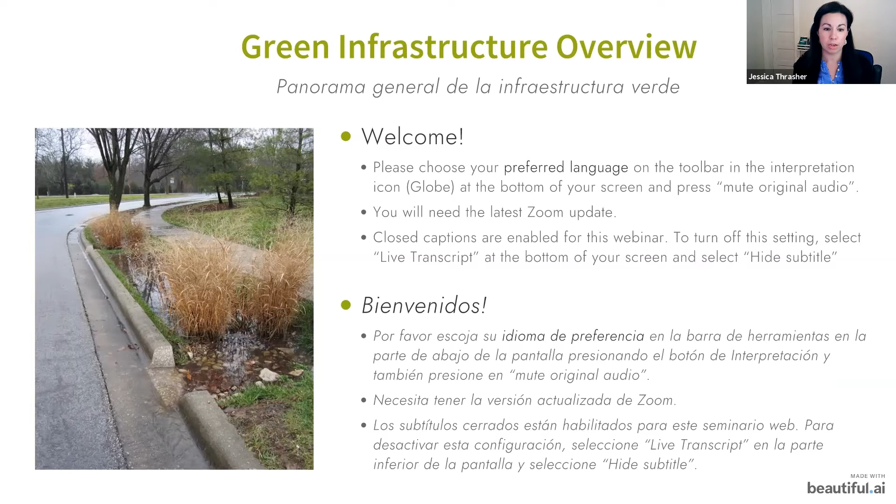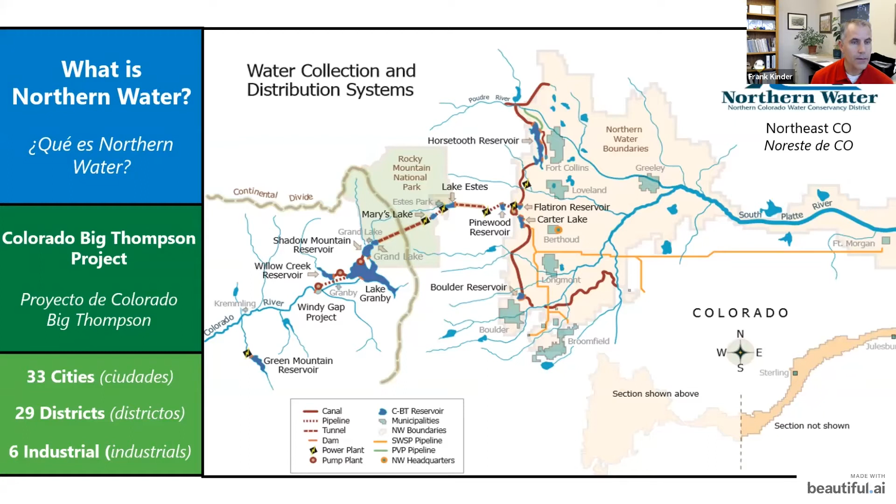If you're unfamiliar with Northern Water, in the last 3 years we've launched a variety of services in support of what we're doing today. We have a campus here in Berthoud where you can come see wise water landscapes. We provide consultations to HOAs, businesses, and municipalities. So if you're in a community that could use our consultation service, which is free of charge, we welcome you to reach out to us.

We also provide irrigation audits to establish a benchmark for water use in existing landscapes. Further, we can also help with future landscapes and understand ways to maximize designs for low water use. We have some tools available on our website under fact sheets and tools. We also provide grants to transition high water use landscapes to low water use and provide ecosystem services to support pollinators and other species. And then we also are helping cities plan for efficiency - there's a lot of growth in the region, and we want to be as responsible as we can with that growth to maximize water efficiency, considering the drought we're in.

Training and events are one of our feature services, like our program today. We also provide an annual conservation fair, generally in the summertime - once COVID is over, we welcome you to attend, generally in June. Finally, we run a network of 23 weather stations in the region where we provide details to people providing irrigation in the most efficient format, watering to ET or below. We would like you to visit our website, find out what we've got to offer, and then we would welcome you to future training events.

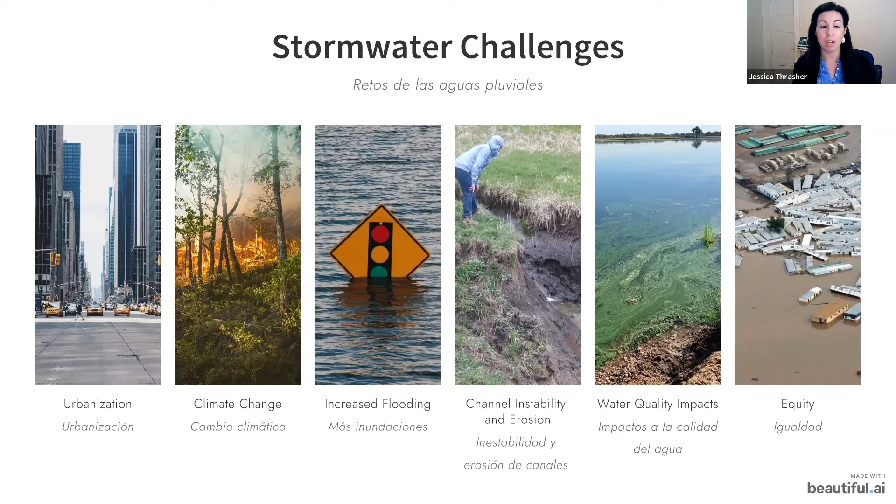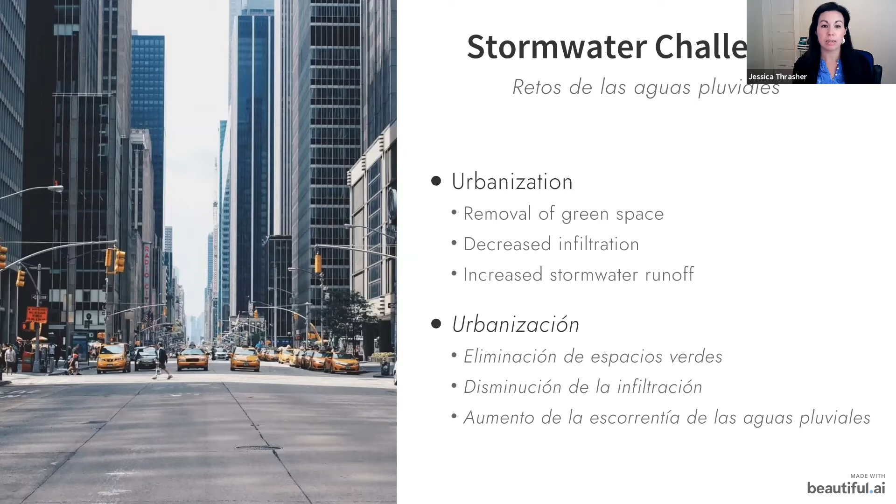The reason why we're having these increases in stormwater is due to urbanization, or the paving over of our landscaped areas as our cities expand. This has caused a lot of different issues, one of these being the removal of green spaces and decreased infiltration. Whereas before, when it was vegetated cover, the water was able to soak into our landscapes. But as we paved over those surfaces, that water is no longer able to infiltrate, and this has caused an increase in the amount of stormwater that we're seeing.

Now, those are just a bunch of numbers. So how does that really relate to you and all of us? Well, if we have a change in our landscape that goes from 10% runoff to 55% runoff, that means we're having to deal with a substantially increased amount of stormwater.

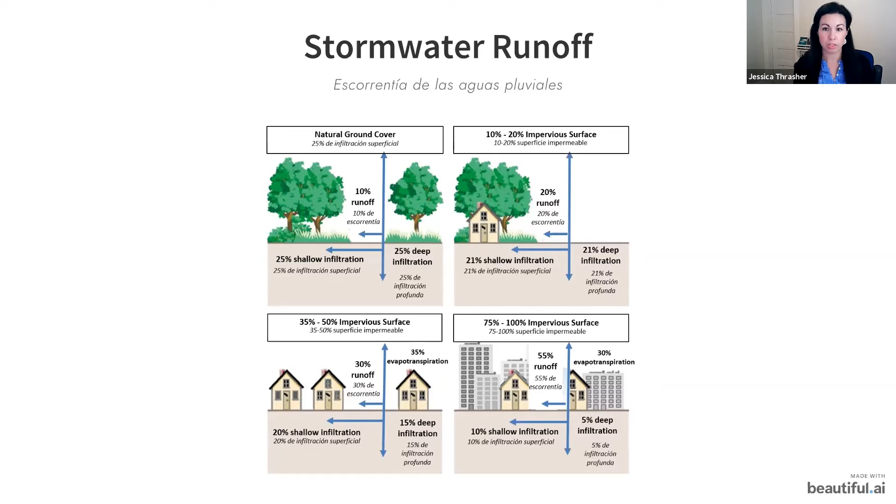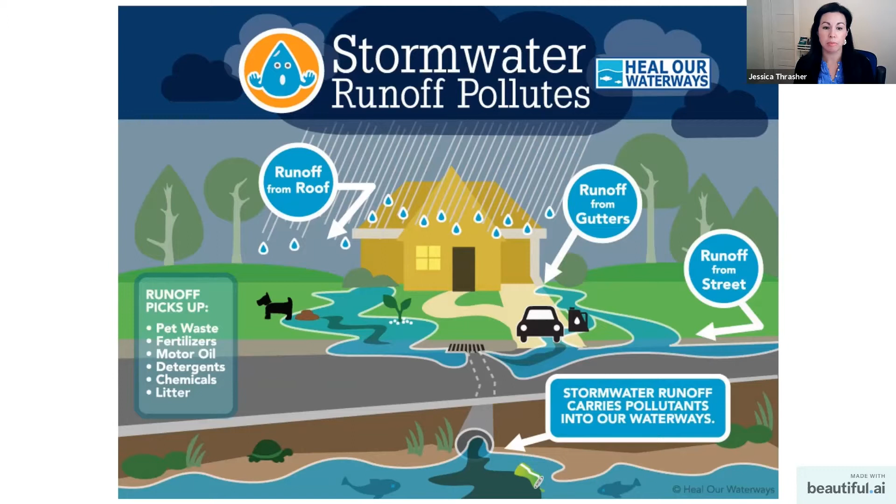Additionally, one of the other stormwater challenges we're seeing is climate change. In our region, we've seen in a very real way this year, drought. Drought is becoming less of an event that we see occasionally and becoming something that we are dealing with regularly. We're seeing multi-year droughts now, and we're trying to figure out how to manage the amount of water we have with the increase in population, while receiving less precipitation overall.

Additionally, with stormwater, we have wildfire. The intersection of stormwater and wildfire are extremely connected. This year, from last year's fires, I'm sure Northern Water is very involved with this and can speak at length about it. But the way wildfires are impacting our water quality is that we're having more sediment run into our waterways. There's less infiltration because of those burn areas, and so increasing volumes of water are running down hill slopes and into our waterways. I'm not sure if you've heard about the Glenwood Canyon mudslides, but the burn areas were receiving a lot of water and causing mudslides. So water and climate change are very closely tied.

As I was mentioning too, as we have increasing impervious areas, we have increasing amounts of flooding. This can be nuisance flooding, where we have more dangerous driving conditions, or basements flooding, or if you're trying to have a walkable city, you're no longer able to because the sidewalks are flooded. Or these could also be catastrophic flooding. We even saw this earlier in the year with the Poudre Canyon, where there were several tragic losses of life because of that increased runoff in those burn areas.

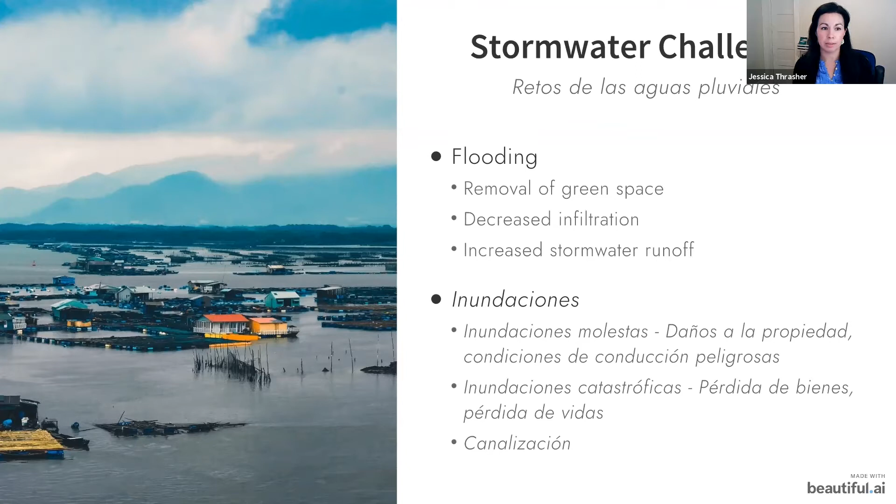We also have channel instability and erosion. As we have increased volume of water coming down, this is cutting into our vegetated areas and making these channels. As water moves across a vegetated surface, it infiltrates, and those pollutants that were in that water are then absorbed into that landscape and trapped into the soil profile. The water that goes through that profile is then cleaner. So that vegetation cleans the pollutants out of the water, and the water that goes into our groundwater systems is then cleaned.

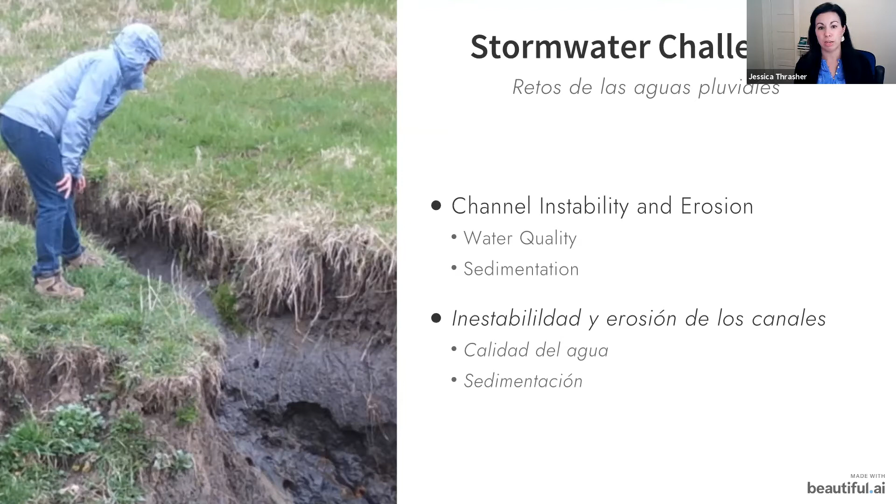When we have channel instability and erosion, water cuts through those layers, and those pollutants that were trapped within the soil profiles are then re-released into our water. So then we have sediment in our water, but also those pollutants that were in that vegetation previously, thus lowering our water quality.

As I mentioned before, as stormwater moves across surfaces it picks up trash and debris, potentially E. coli from pet feces, and deposits it into our waterways along with fertilizer. This can create issues around algal blooms, which pose hazards to human, pet, and aquatic health.

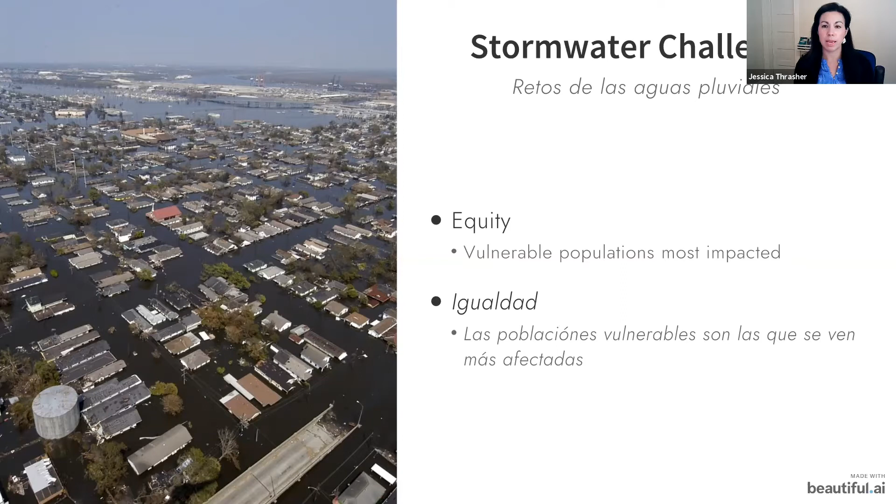Finally, stormwater challenges around equity. As we see more climate changes and increases in flooding, the vulnerable populations we have are the most impacted. So as we figure out what to do about our stormwater challenges, keeping equity at the front of our mind and ensuring we're installing sustainable infrastructure that elevates these communities is of paramount importance.

So what has stormwater management looked like in the past? I'd like to start with the ways that we view stormwater. What does stormwater mean when you think about it? Looking at this graphic, the way stormwater has been treated in the past is really that it needs to be removed from properties as quickly as possible.

And there were good reasons for this. You don't want water sitting against foundations. As water collects in urban areas, it poses issues of flooding. But it's also been seen as a waste product, and really not seen as something that we can utilize to our benefit.

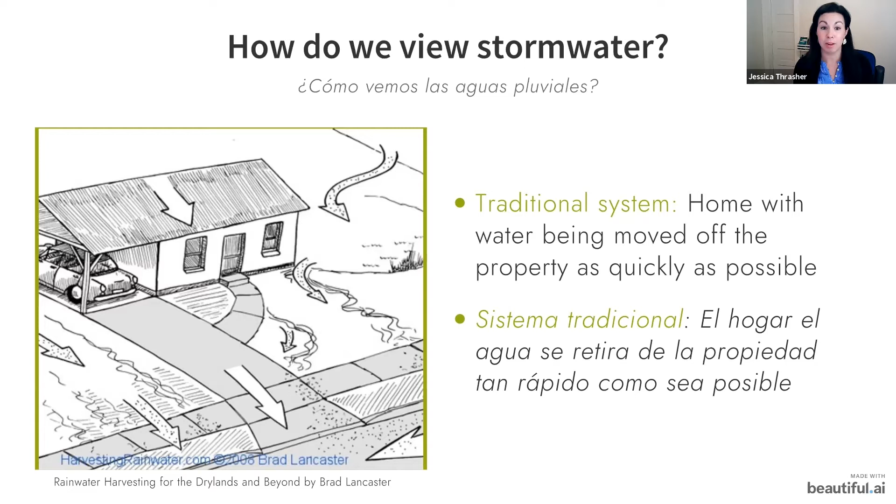Stormwater management has really been isolated. You're looking at this issue kind of in a silo, not connected to other municipal areas like water conservation. Really just looking at stormwater - how can we reduce the amount of water sitting in our streets, and how can we get it away from our community as quickly as possible?

So I'd like to talk about what gray infrastructure is, since we're talking about green infrastructure today, to make that contrast.

Gray infrastructure, if you're thinking about it, is really about starting at the top. Let's talk about a roof line. A roof line, you don't have a pervious area, so it runs off of your roof into your downspout, as you can see in the picture on the left, then onto a curb, then onto our sidewalks and our parking lots. This is all just running directly through, and then into our curb and gutter system.

Many of you may have also seen these illustrations that say 'no dumping, drains directly to the river.' A lot of times our stormwater goes from the roof directly into these storm drains, which go to our rivers and streams. So what we mean by gray infrastructure is that there is no vegetation allowing infiltration to happen - it's all concrete, all hard surfaces. Infiltration is not able to pass through gray infrastructure.

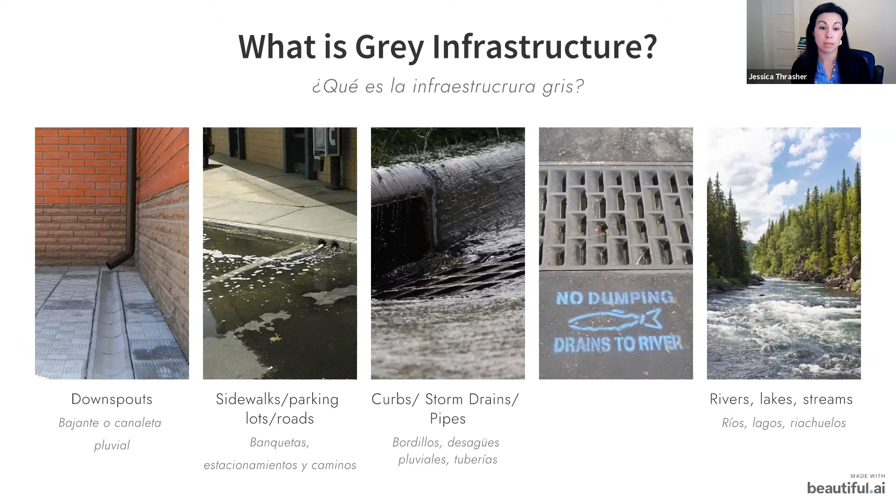One other very common type of gray infrastructure is the extended detention basin. You might be wondering, well, it can't be all gray because I see green right there - and you're right, there are abilities for water to infiltrate when there is this grassy basin. But there is also a lot of concrete involved here, and the normal flows would enter into the extended detention basin and go directly to the outlet, and all of that is concrete.

The extended detention basins are settling out pollutants. They slow water down and collect it in this basin so that pollutants can drop out of the water through a process called sedimentation. Typically, the extended detention basin holds water for about 40 hours and then releases it through the outlet structure.

The third in our series will be talking in depth about extended detention basins. Since these are the most common type of stormwater management you'll find in Colorado - if you're an HOA, if you're a landscaper, even if you're a regular citizen, you're seeing these. If you're an HOA, you probably own one, and if you're a landscaper, you might also be maintaining these. Knowing what they look like, how they function, and how you can keep them working their best are really important, so I'd highly encourage you to attend our final session.

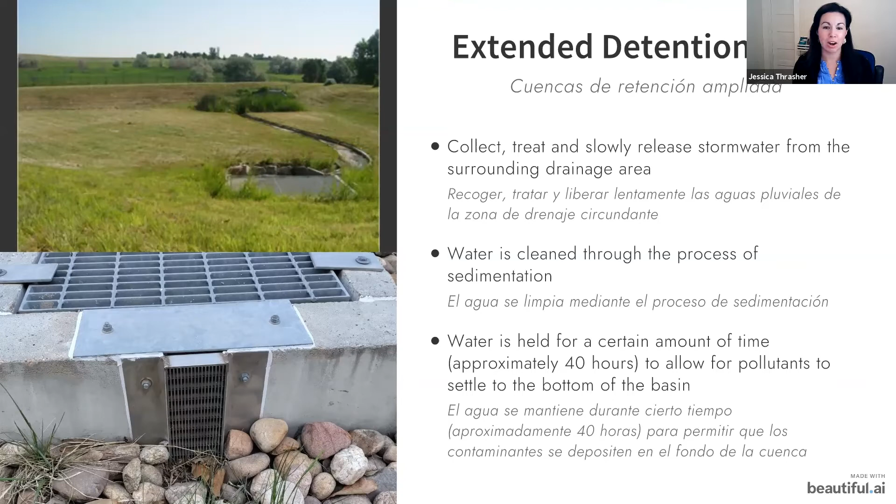Before I move into green infrastructure and getting into depth on what that is, I'd like to pause a moment for any questions. You can put those into the chat, or you can unmute and ask me directly.

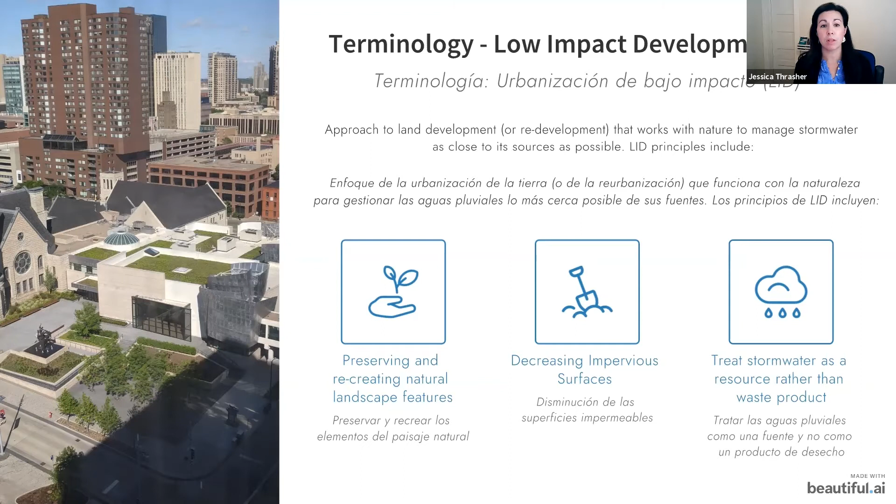Green infrastructure refers to the systems and practices that use or mimic natural processes. These processes include infiltration, evapotranspiration, and reusing stormwater runoff where it is generated. Because of those two definitions, you can see why they're used interchangeably.

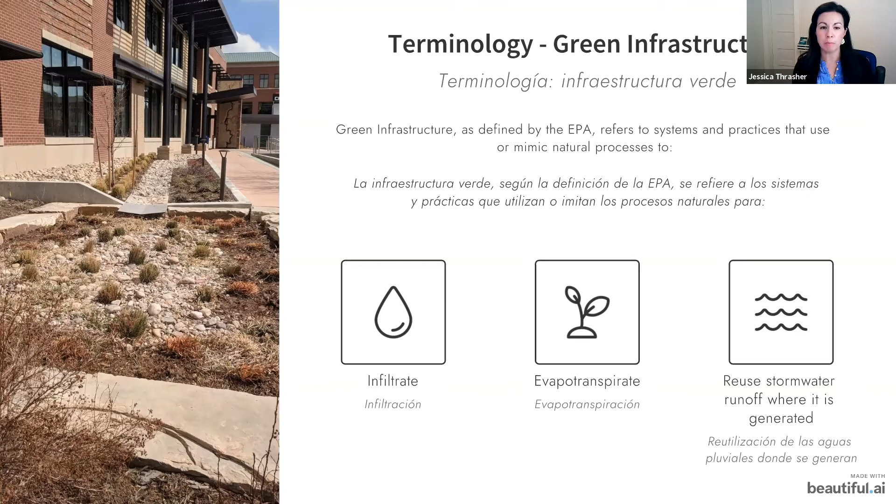You can also use green infrastructure in combination with more traditional stormwater elements, such as having a rain garden but also having stormwater pipes.

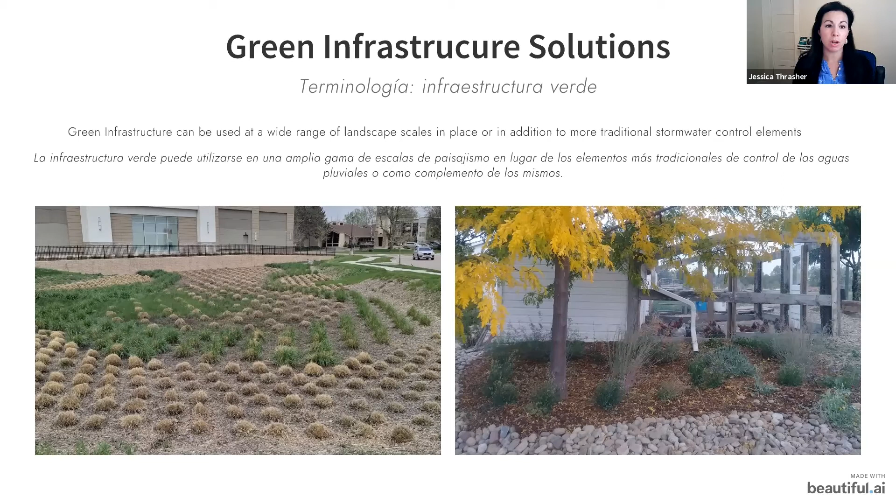Green infrastructure is also looking at the intersection of multiple elements. How can we have infrastructure that improves the quality of life of our cities, but also protects the environment and has economic benefits? It's really looking at the triple bottom line effect.

Today, I'm going to talk you through some different types of green infrastructure and give you a very brief overview of each of these different technologies.

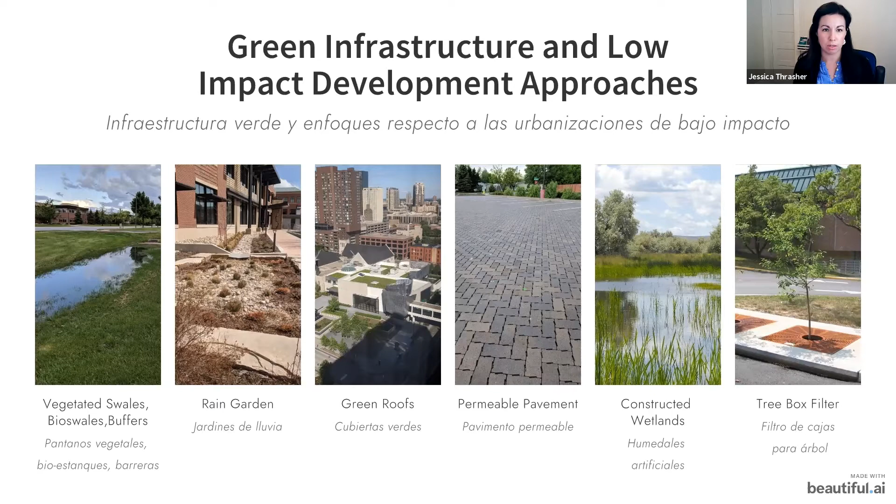To start with, the vegetated swale, which is an open channel to allow stormwater to infiltrate. You'll see these next to parking lots. They are a U shape instead of a V shape—V-shaped channels are actually for irrigation, but that's not what this is. A vegetated swale is to allow water to infiltrate. Instead of a curb and gutter, the water goes from the parking lot or roadway down a slope into that U shape so the water can sit there and move slowly, allowing infiltration to happen as it moves along that channel.

It reduces your runoff volume, so there's less water going into the storm drain, preventing flooding issues. You have better water quality because that water is soaking into the ground and being purified as it goes through the soil profile. You're also having additional green space available, which has multiple benefits—this can be used in your community when it's dry, enabling people to have more access to nature.

It also limits the erosion you'd get from water moving quickly across a sloped surface, by keeping it vegetated so you're not having channel instability and erosion occurring. It also removes sediment, providing better water quality. One limitation of this technology is that it requires quite a bit of space, which is something to consider as you look for alternatives for your stormwater.

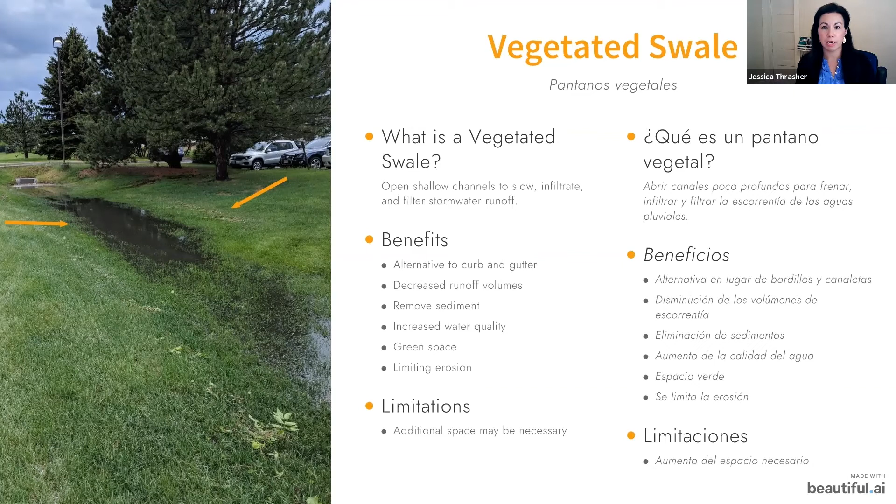The difference between a vegetated swale and a grass buffer is that the vegetated swale is narrower but longer, with that U shape, while the grass buffer is wider and flat. That's the difference between the two.

It has the same benefits of removal of sediment and pollution, and increased infiltration. You get that green space again, and also break up the impervious area where water just transfers from your roof to the sidewalk, to the parking lot, to the storm drain—increasing your ability for water to infiltrate. Again, the limitations are increased space requirements, and you might need an underdrain.

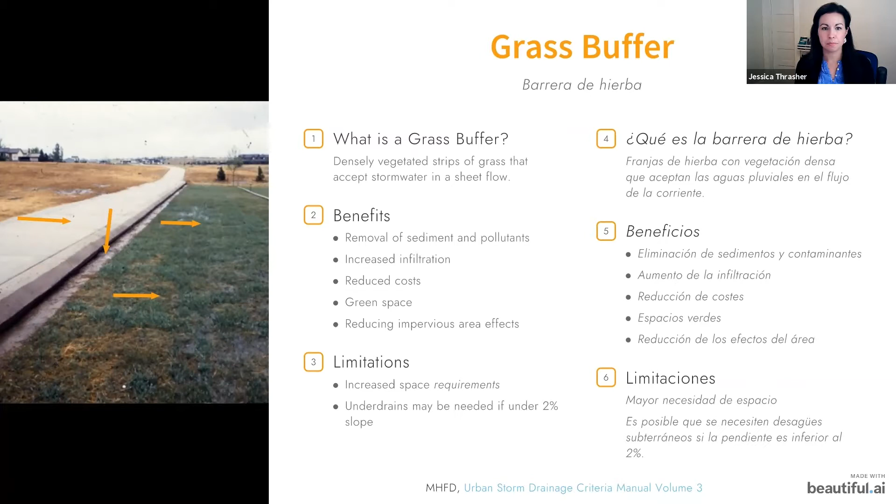Next, a rain garden. A rain garden is a landscape depression designed to slow, capture, and infiltrate runoff. I could talk all day about rain gardens, and in fact I will for our next session, so this is just a very brief introduction. What's really beneficial about rain gardens is you're using that stormwater as a resource. You're taking it as it comes from your storm drain, enabling it to infiltrate, where it can also double as a benefit to your landscape.

You can water your own landscape with the storm water, so you're having two benefits in one—actually three, because you're also purifying the water. You have reduced irrigation needs, reduced runoff, and you're treating that water. So if you're planning projects, rain gardens and this type of green infrastructure let you check multiple boxes for incorporating this strategy.

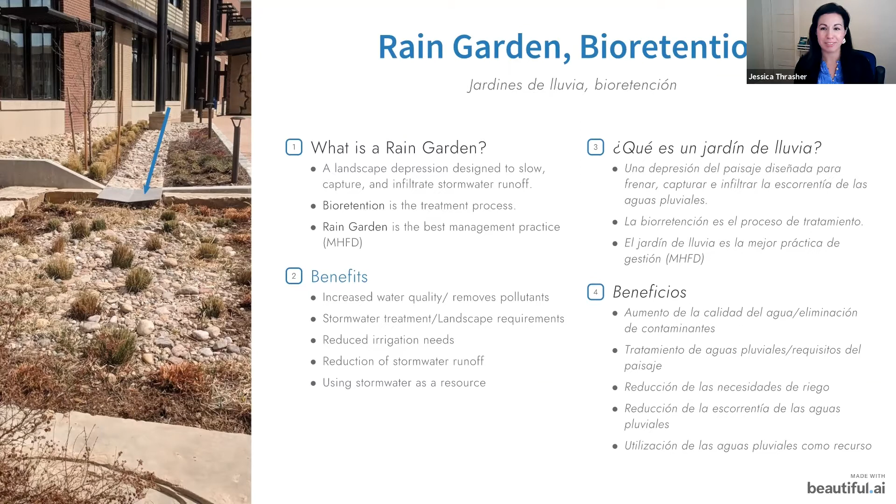Additionally, with rain gardens you're able to have those multiple benefits I mentioned. I just lost my train of thought there, sorry—I'll come back to it and remind myself.

With this bowl-shaped installation, all of the water and pollutants are concentrated in the center, so the plants on the outside of the rain garden aren't getting any water. All of the filter material that comes with the rain garden is being clogged right in the center. This also shows improper maintenance, as that sediment and those pollutants are being concentrated.

Some considerations for rain gardens: the vegetation has to be established first. Once established, you don't have to water a rain garden because it's based on planting native plants acclimated to the drought and rainfall we get. You might also need an underdrain—this is when our soils can't drain the rain garden as quickly as water comes into the system, so an underdrain allows water to pass to the storm system more quickly than it would with just the native soil. In some cases, it might need that underdrain.

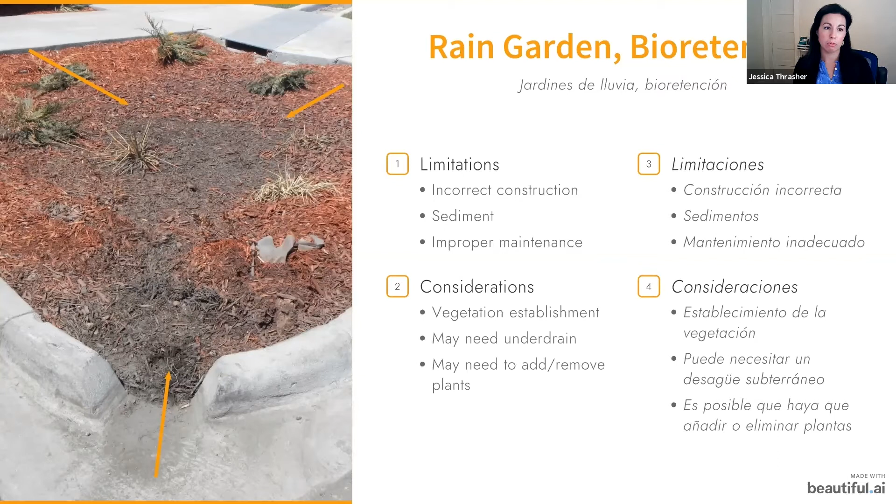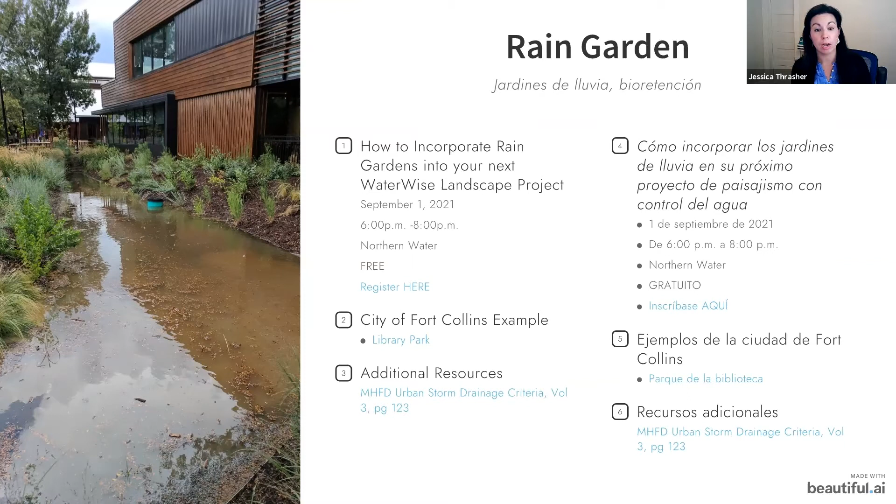There are two different types of green roofs. One can be extensive.

These are about 30 pounds saturated and 4 to 6 inches. These are the best for retrofits because they're lighter.

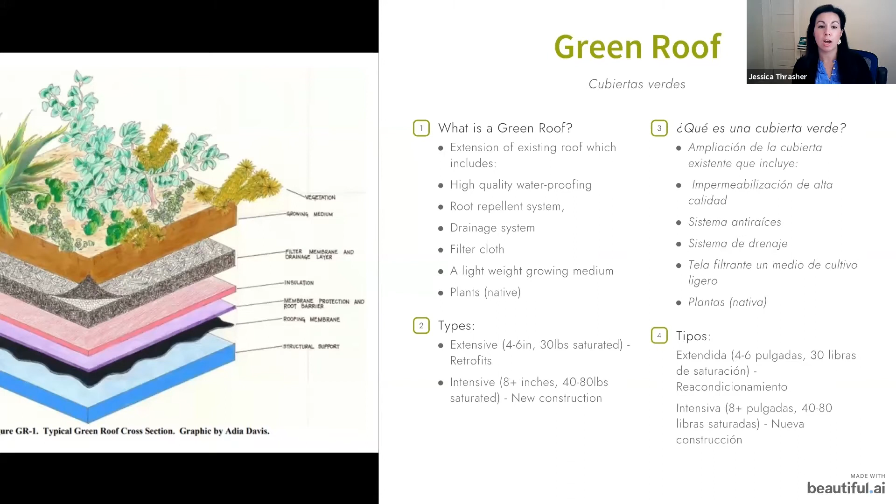The next type is intensive, and these are deeper. They are over 8 inches, and 40 to 80 pounds saturated. This type of green roof is best combined with new construction because they need additional supports in place.

As with our other strategies, green roofs reduce runoff. They have the additional benefit of reducing heat island effect. These are very effective in cities where you don't have a lot of additional space to add vegetation. Since you already have all of your parking lots and sidewalks, utilizing the existing roofs is a really great way to reduce your heat island effect without needing that additional space, since it's so costly to have additional landscape area in cities potentially.

You're also insulating your roof, so you're having a lot of energy savings, which can get you LEED credits. It could potentially extend the lifespan of your roof. And as I mentioned, there's no extra space that you need since you already have your roof in place.

Some of the limitations with the green roof: it could potentially have high installation costs. But I want to say that the life cycle cost could be lower, so when looking at the cost estimate, looking at that life cycle cost is really critical. With some of our green infrastructure, the upfront cost could potentially be higher, but over the life cycle of that infrastructure, they are lower overall.

Supplemental irrigation is needed. In our climate, we will need that additional water initially to get those plants established, and the costs with that initial establishment are also there.

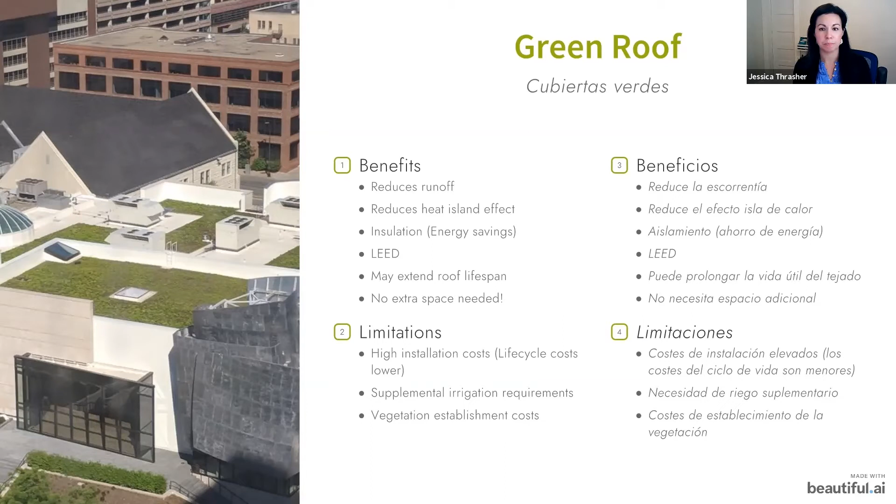Next, we have permeable pavement. Permeable pavement allows water to soak and infiltrate between these pavers or between the layers of that material. There are three different types: pervious concrete, porous asphalt, and the third type is permeable interlocking concrete pavers, or PICP, which is pictured here and is the most common in Colorado.

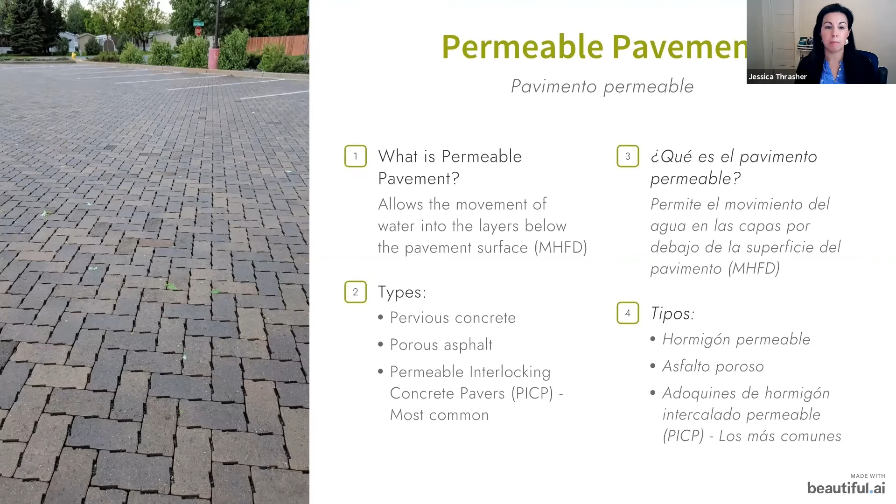The benefits of this one are it serves multiple purposes. Once again, if you're in a city where real estate is at a premium and you need a parking lot but don't have room for a large grass swale, by having the permeable pavement, you can have infiltration, clean the water, and have your driving surface as well.

Having permeable pavement helps alleviate drainage issues because it soaks in and doesn't just sit on top of the pavement surface. Because it is infiltrating, you can have benefits to nearby tree health since they're getting that additional water as it soaks into the ground.

There is not typically an ice issue on permeable pavement. We get ice when the snow melts and then sits there and freezes. But with permeable pavement, as that snow melts, it soaks right in, so this is a really great strategy for not having ice on your parking lots. Again, you can get LEED credits for it, and this type of strategy can be used in combination with other LID practices.

Some limitations are they're not for use near sparse areas of vegetation, where you could potentially have a lot of erosion happening and a lot of sediment running through your stormwater and ending up on your permeable pavement, because extra sediment will clog your permeable pavers.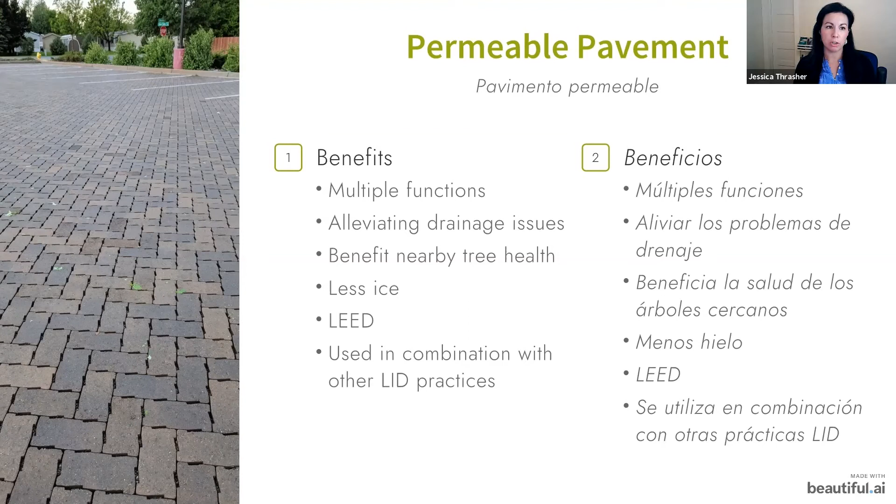The best pattern for permeable interlocking pavers is the herringbone pattern, because it offers greater stability and you will not have issues with movement of your bricks. By using these two strategies, you can really extend the longevity of your permeable pavement.

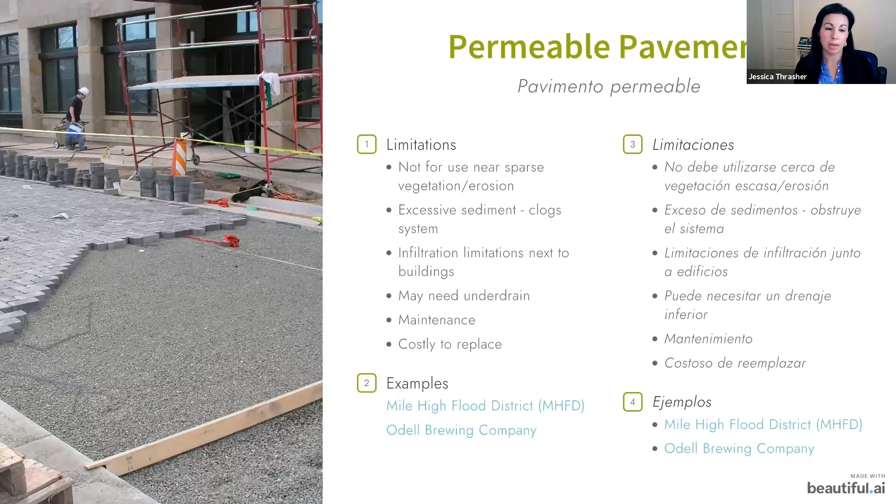The next strategy is constructed wetlands. A constructed wetland is a retention pond that has water consistently, and it's slowing down the runoff that you have so that the pollutants can drop out.

This is artificial, so these are constructed by us. They are not natural wetlands. These are a stormwater feature designed to clean the water, but it's also a natural feature, so you're having habitat and these wetland plants, and you're getting a lot of the natural benefits as well. But you have to keep in mind that these are not a natural feature, and that they're designed to collect pollutants, which eventually will need to be cleaned out.

Some additional benefits in addition to habitat are open space. I think COVID has really shown us how important the outdoors is and how critical having access to open spaces is. So with this type of stormwater feature, you're able to have stormwater quality protection as well as open space and also flood control.

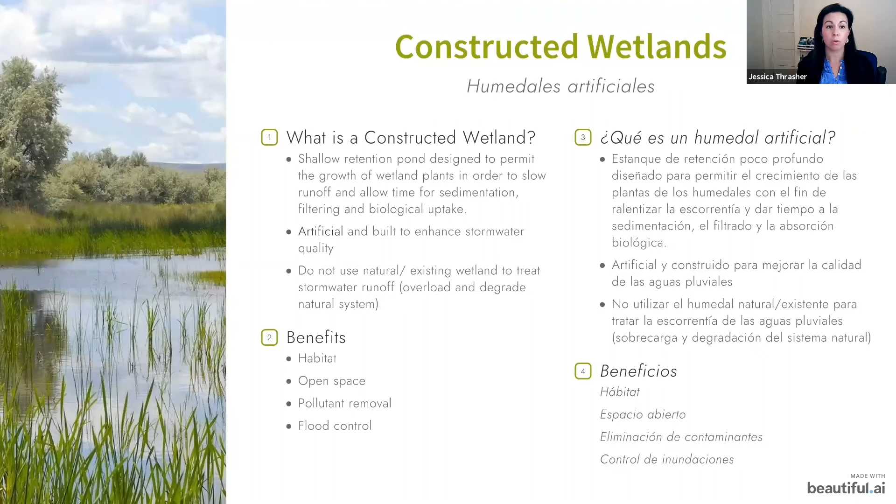One of the limitations, and why we don't typically see a lot of constructed wetlands in Colorado, is because of the water rights issue. You need to obtain a water right in order to construct a constructed wetland. These can have debris in them, as well as algal blooms can be an issue. Since these features are trying to clean the water quality, one of the issues we see is nutrients from waterfowl, which add contaminants to the water.

Once constructed, wetlands typically need to be cleaned out every 15 to 20 years. When that happens, you have to dredge out the bottom of your constructed wetland to remove all of the pollutants that have accumulated over time. You need to do that during the winter so there's no endangered species impacted, and with minimal impact to the vegetation as possible, since there will be some reestablishment of that vegetation afterward. But 15 to 20 years is quite a long time.

Some considerations for constructed wetlands: they need to be designed for maintenance, so you can get the correct tools in to maintain them. Otherwise, it's going to be very expensive and difficult to clean out when that time comes.

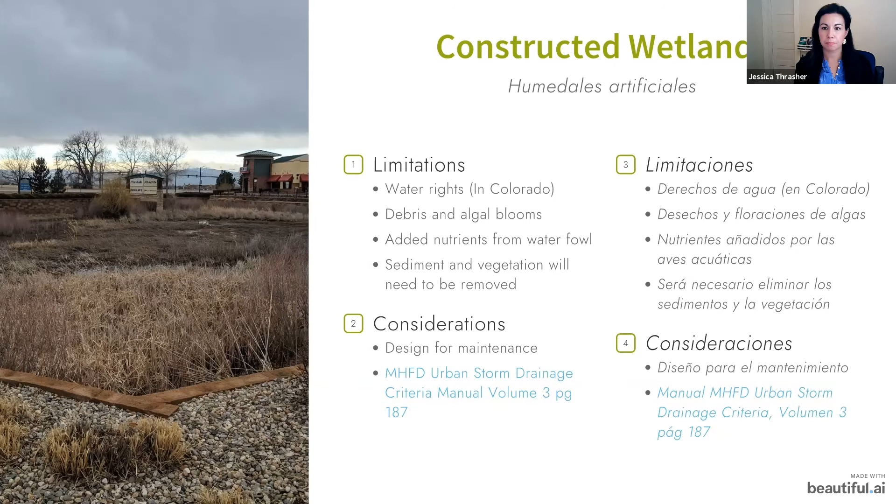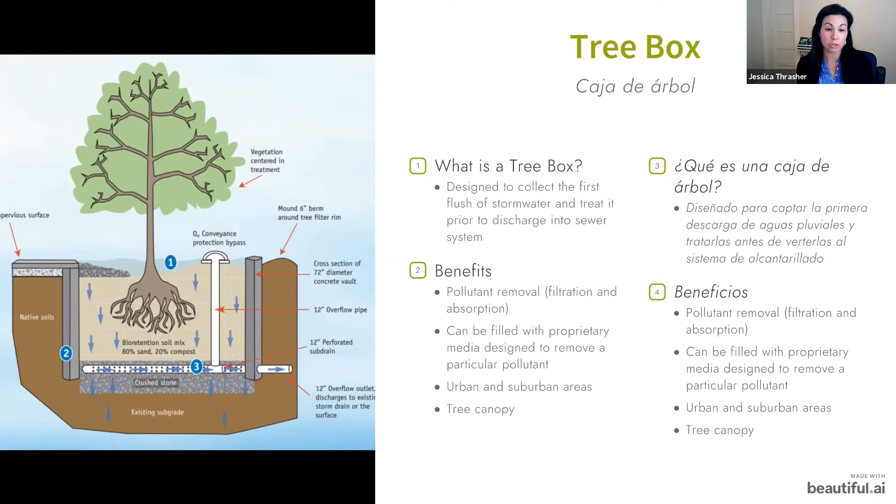The next strategy is a tree box or tree filter. This one acts very similar to a rain garden, collecting the runoff. It's typically next to a roadway or sidewalk, collecting the runoff and treating it before putting that cleaner water into a storm sewer system. Pollutants are removed as it moves through the filter media, and you can fill it with different types of media to remove a particular pollutant if the area being treated has issues with something in particular. You're also adding to the tree canopy and the benefit of additional trees into your urban and suburban areas.

Here is what one looks like that's been installed in Fort Collins. As you can see from the arrows, the water enters into this grate and interacts with the filter media. If that tree box has already filled up with water, any additional runoff will go directly into the storm drain right next to it. Any water that enters the tree box is required to go through the filter media down to the under drain at the bottom, where the purified, cleaner water will go into the storm drain it's connected to.

This is really to treat small stormwater volumes, and you're also dealing with a tree. So you need to have an arborist come out to potentially check this tree, or that tree might need to be replaced if there's some issue with it living, or if it has some infestation issues.

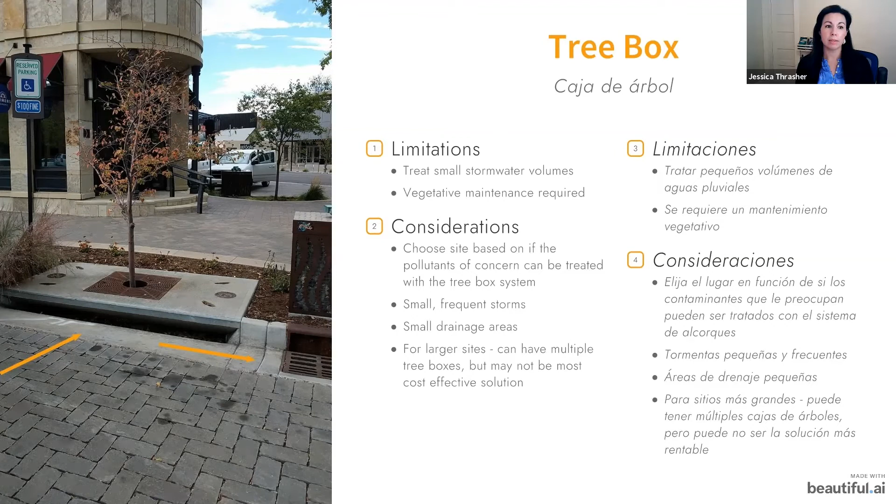When choosing a site for your tree filter, choose based on whether the pollutants can be treated with a tree box. If there are smaller, more frequent storms and a smaller drainage area, these would be good choices for a tree box. For larger sites, you can have multiple tree boxes together, but that might not be the most cost-effective solution. So look at other green infrastructure solutions that might pair with a tree filter for a more cost-effective strategy.

There are numerous benefits of green infrastructure and low impact development. We get groundwater recharge. During storms, if water isn't able to infiltrate, it goes directly into our rivers, causing a spike in river flow, and then that water disappears. But when we infiltrate water into groundwater, it still makes its way to the river, just slower—groundwater acts as a storage area, keeping river water there for longer. We also get decreased heat island effects, potentially lower energy consumption especially with green roofs, and reduced flooding—both nuisance flooding and help alleviating catastrophic flooding when paired with existing stormwater infrastructure.

We look to manage stormwater as a resource, not something to get rid of as quickly as possible, but something of value that benefits our communities. We look to stack functions—how green infrastructure can help build communities, build economies, and protect the environment. By treating and managing stormwater as a resource, we get decreased demand for irrigation, especially when paired with a rain garden, and increased community access to nature.

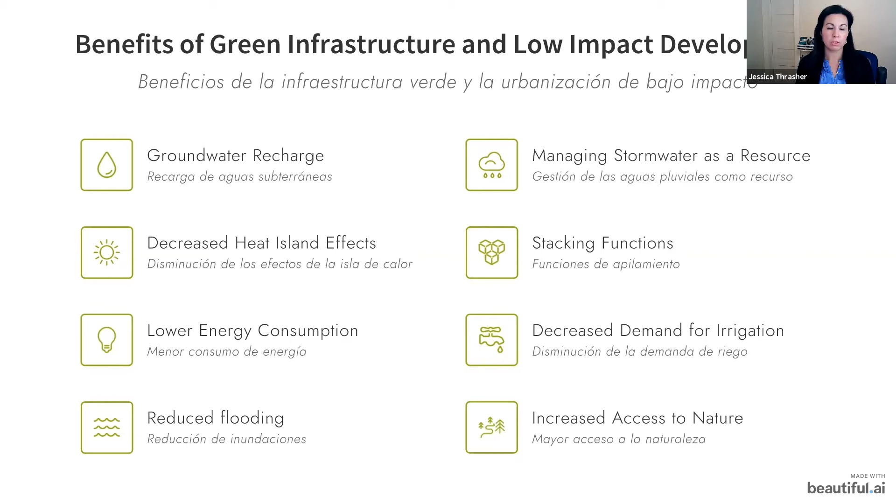So there are, again, numerous benefits to green infrastructure and low impact development. I'll pause here for questions before going into examples of green infrastructure.

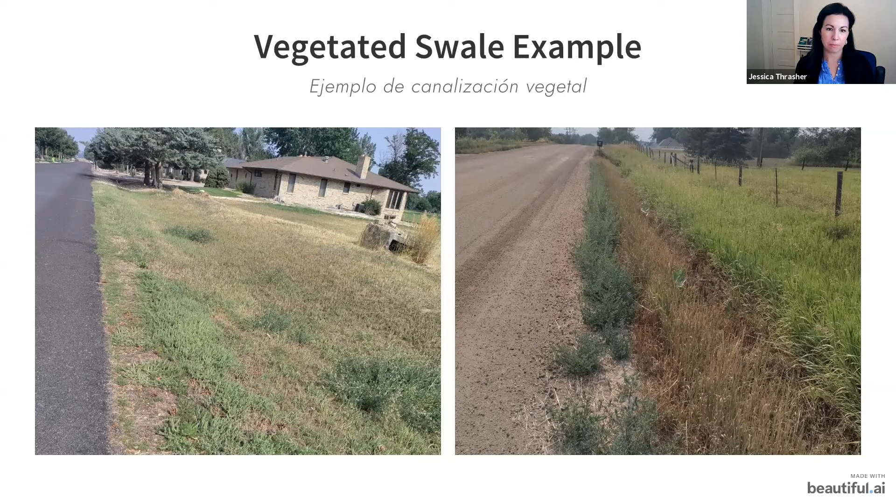There are other homes that have been using plants in addition to rock, just to set the stage for you. I know this is a lot of pictures, but I wanted to make a point. The one on the far left was the first picture I showed you of what a vegetated swale should look like. The term is vegetated, right? It needs to have vegetation.

Looking at the next picture over, this was supposed to be a vegetated swale. You can see it has that same shape, angling in from the road, but it's all rock. Let's look at the third picture, from a different angle. You can see that this was originally a vegetated swale, and then landscape fabric and rock were put there instead of the grass.

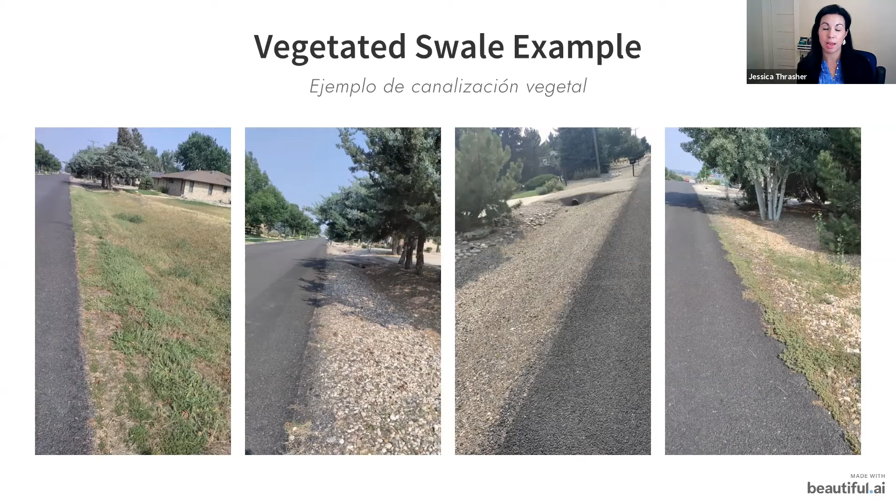Okay, the next example, here are some rain gardens in Fort Collins again. The left-hand side is a street rain garden, collecting runoff as it runs down the street. Instead of going into a curb, it's infiltrated right next to it. This allows traffic to be slowed down in that area, as well as the additional benefit of vegetation slowing down the rain garden.

So that's what a rain garden looks like when it's full. The next picture is after the storm, and you can see there's a lot of buildup of material, debris, and sediment moving down our roadways. This shows in a really real way the need for our water to be cleaned before it hits our rivers and streams. The middle picture shows that you need to clean that before the next storm, because otherwise it will not function as it should.

The water will actually not be able to get into this rain garden because there's sediment buildup right where the water is supposed to enter. This illustrates how well this rain garden can work when it's being maintained properly. The next picture shows that if it's not being maintained, it will not function at all. So while we're thinking about where to install our green infrastructure, we also need to talk about how to make sure these are designed for success so they continue to function and provide all the benefits they can bring us.

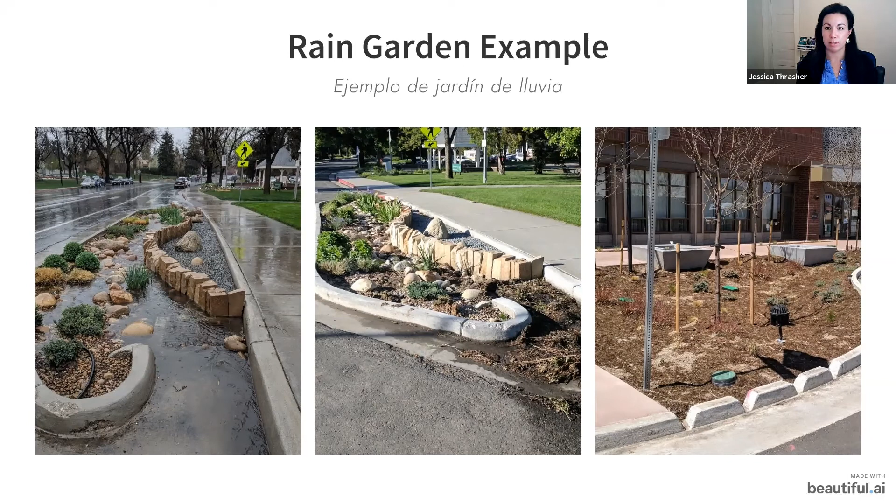And then these are examples of rain gardens not working. The picture on the left, I showed earlier, was planted in this bowl form. The picture on the right, how could you even tell that was a rain garden? It looks like rock, and that is because the inlet isn't letting water in appropriately, and the appropriate plants were not selected. So this rain garden never got a chance to be successful because it wasn't set up for success in the first place.

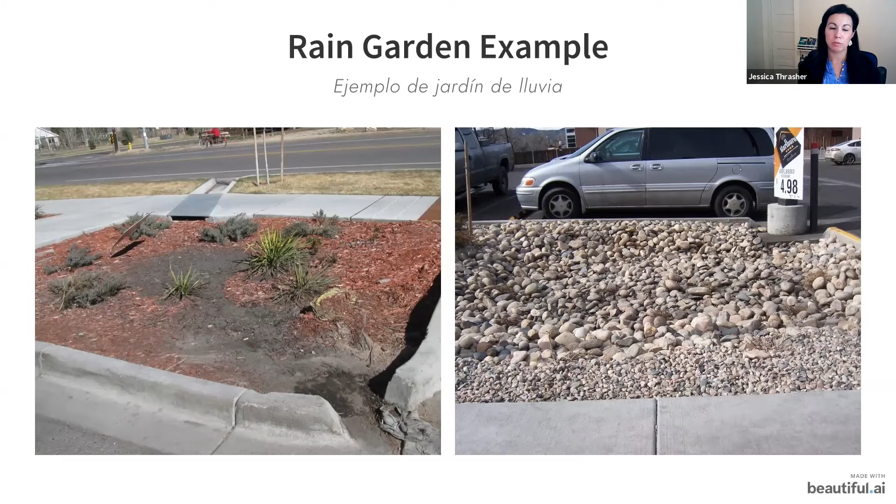Additionally, it's really better to use mulch instead of rock in rain gardens because mulch helps to build up the soil, whereas rocks, you'll have to clean out the sediment that accumulates in them, they don't break down or help the soil, and they also add heat to the plants, making it harder for them to survive. So these are examples of what not to do with your rain garden.

Here is a permeable pavement example. This is a way that permeable pavers can be installed, in that herringbone shape, which is a really great structural integrity way to install permeable pavers. Also shown on the far right is how there's no ice on this, as the snow melts it goes right into the infiltration layer, and it does not cause ice buildup on your parking lots or walkways.

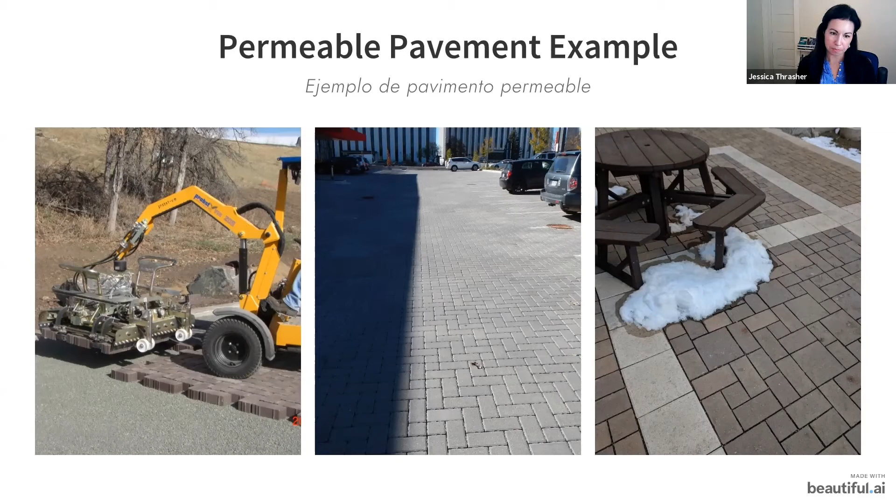Here is what it looks like when it's not functioning. When you see this buildup on the left-hand picture of tree debris, like leaves, on top of your permeable pavers, that is when it's not infiltrating. Permeable pavers are supposed to infiltrate water at 20 inches per hour.

If we were in person, I would ask anyone what they thought a typical rain event in Colorado was. Anyone? I would call on someone, but typically, if we had a 3-inch storm, that would be a huge storm for us. So a 3-inch storm versus 20 inches per hour. Permeable pavers should be able to handle whatever storm we get in Colorado typically.

So when you see water sitting on top of permeable pavers, like in this example on the left, you know it's no longer functioning how it should, and that filter material is clogged. Permeable pavers don't last as long when you have a lot of tree cover around them, because that is how it gets clogged. That's one of the reasons why these permeable pavers failed on the left, because of all the debris accumulating on top, pollen and leaves and that sort of thing.

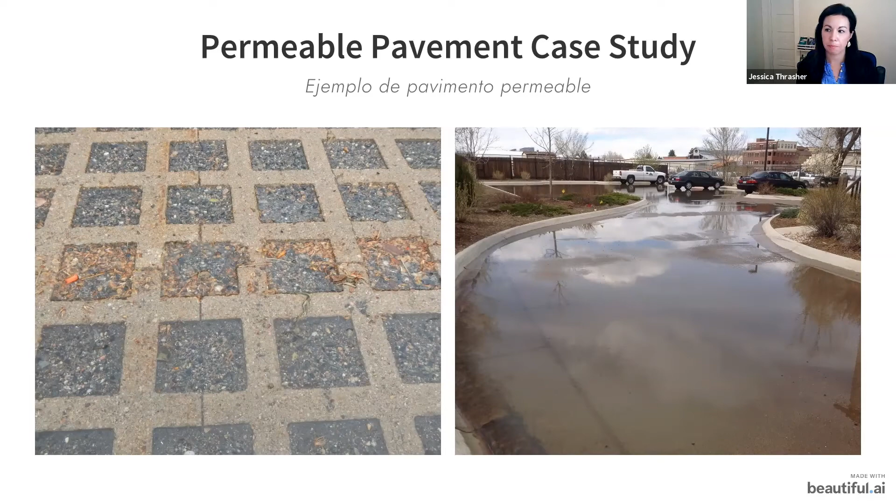Before I move on to some barriers, are there any other questions on the examples I shared, or things you've seen with green infrastructure while driving around?

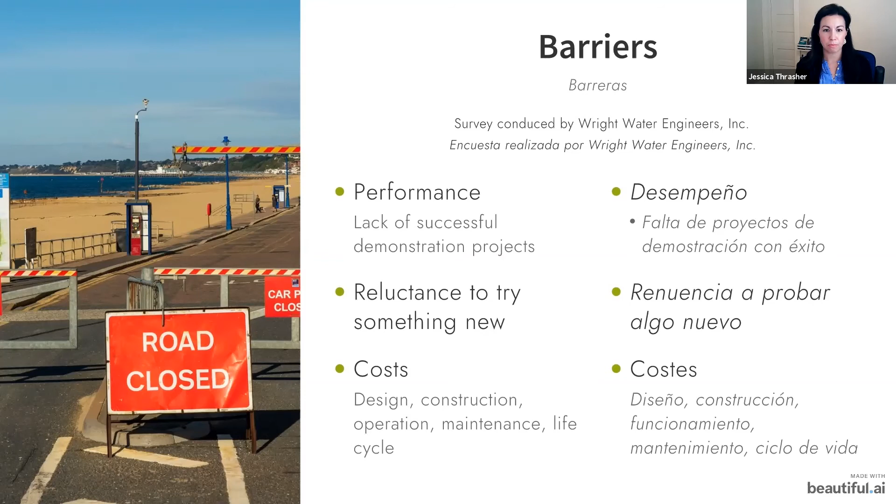Maintenance requires new techniques and training. Contractors already know how to install curb and gutter systems, getting asphalt and concrete in place, but knowing how to put in green infrastructure, like the rain garden I mentioned, is different. If you do not install it correctly, it will fail. So there are concerns around knowing how to maintain and install these strategies.

Codes and ordinances can also be an impediment, where low impact development is recommended rather than required. So we have a lot of work we could do in making green infrastructure and low impact development strategies not necessarily required, but more than just recommended.

Additionally, there may be other types of stormwater infrastructure required even if you install low impact development. A lot of times they work really well together. So there's hesitation to install green infrastructure strategies because the thought is, well, I have to install gray infrastructure anyway, so I might as well just keep with gray infrastructure.

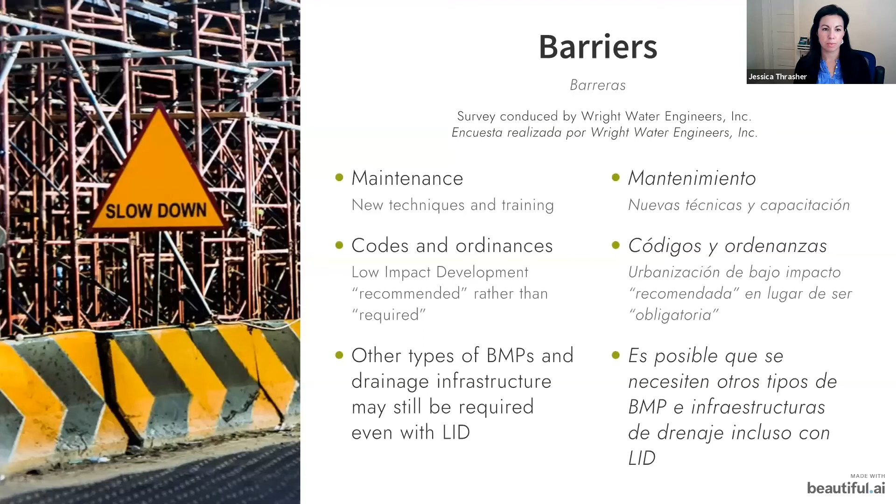So what should we do about that? How can we address some of these concerns?

So when we're looking at the issues of performance and having green infrastructure, what are examples of successful projects? There are a lot of tools to show you examples of green infrastructure working really well.

All of these are links. The EPA has done substantial research on this topic, including a triple bottom line cost benefit analysis you can see in full. Additionally, the Mile High Flood District is organizing chapter 4 of the Urban Storm Drainage Criteria Manual, and I've heard they're using an increasing number of pictures and case studies of these solutions working in our area. That chapter should be out in 2022, and I look forward to seeing those examples.

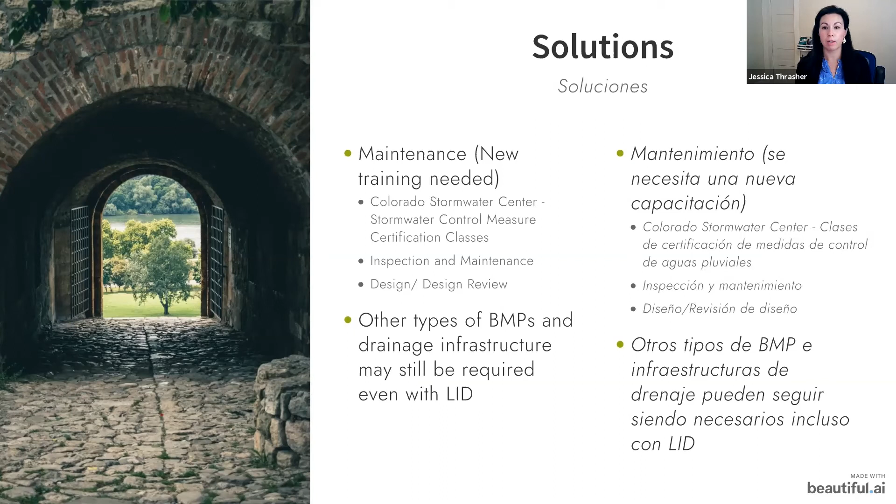When looking at these policies and regulations, I've already mentioned the expedited review process. There are also cost sharing grants for installing green infrastructure, or recognition programs for communities and developers doing it right—that helps them. But for developers and contractors, really reducing fees and expediting the process—I think those are two great strategies we can use in land use development moving forward.

So here are just some examples looking at what gray versus green infrastructure looks like right next to each other.

Here are inlets, where the water is coming in. We're looking at how quickly stormwater is moving from its source to the river. Here we have the rain garden inlet, where you see the water being slowed down and infiltrated. The next one shows a vegetated swale where water moves across vegetation and infiltrates. Then you have a traditional stormwater inlet and curb system, where water is directed to run off into the drainage area as quickly as possible, into the pipes and then into our rivers.

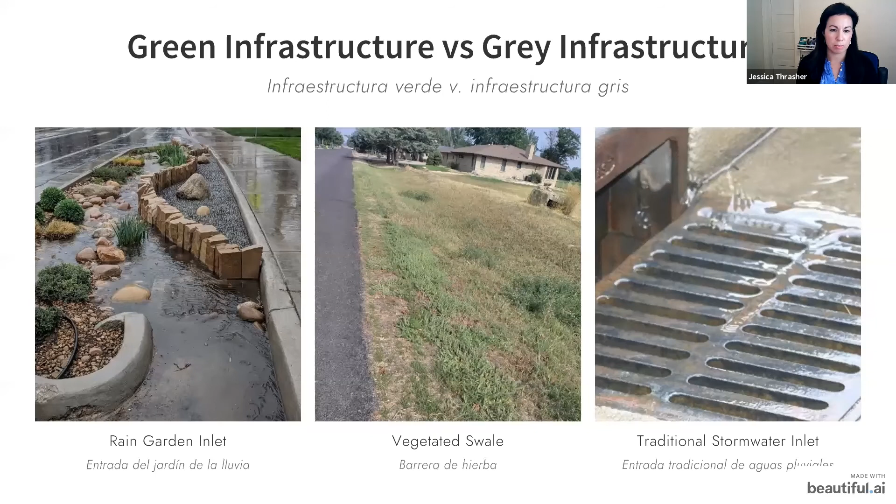Here are some examples of planters in our cities, beautifying our streets. There's been a lot of work around that in Fort Collins, Denver, and other communities. Beautifying your streets can also look like a below-ground planter, which is a rain garden - adding more vegetation while also purifying our water and reducing stormwater, versus the above-ground planter, which requires watering with additional water resources, especially since it gets drier being elevated. You're watering it more frequently with none of the added benefit of purifying stormwater.

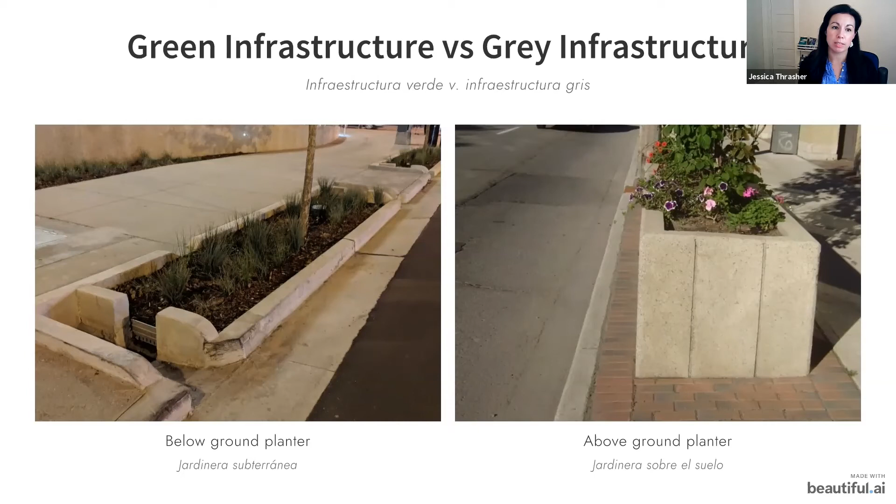This isn't exactly a fair comparison - an extended detention basin versus a constructed wetland - but they're both removing pollutants by slowing the water down. There are limitations around having constructed wetlands in Colorado, but this really just showcases that stormwater infrastructure can look different than it has in the past. What are the opportunities we have to bring more green infrastructure into our communities?

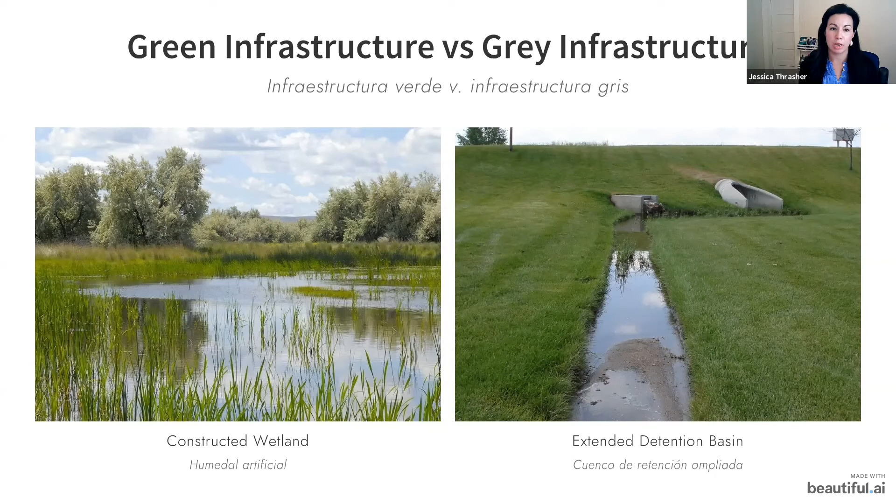Here's an example of permeable pavers being cleaned versus traditional road sweeping. If we're installing these green infrastructure strategies, but already doing measures to clean our streets, it isn't a very large jump to go from regular street sweeping, which protects our stormwater, to doing regular maintenance and sweeping of permeable pavers - especially when you already have those trucks and that infrastructure built in.

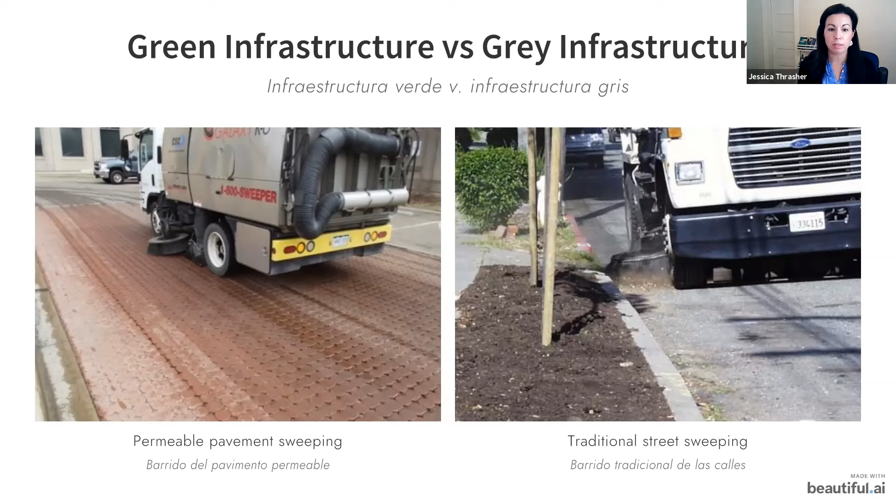So what now? What is the perfect solution? Should we have all green infrastructure? Should we rip out all of our gray infrastructure? No, that's not what I'm saying. I'm not saying all gray infrastructure is bad or that we should only have green infrastructure. We really need to look at how they can work together - how we can incorporate more green infrastructure solutions as we move forward, rather than just saying, okay, we have a new development, let's put in gray. This opens up the conversation to allow more discussion about the benefits we can get.

Additionally, one of the other solutions and mindsets is a one water approach. This mindset looks at all of our water sources - how do they work together, and how can we have multiple benefits: economic, environmental, and social? It's a real systems approach to water instead of having water looked at in silos. The water conservation folks don't talk to the stormwater folks, who don't talk to our wastewater folks. We really need to start breaking down those barriers so we can talk to each other and have this integrated view of our water systems, especially in light of the drought we're encountering and our reduced water resources.

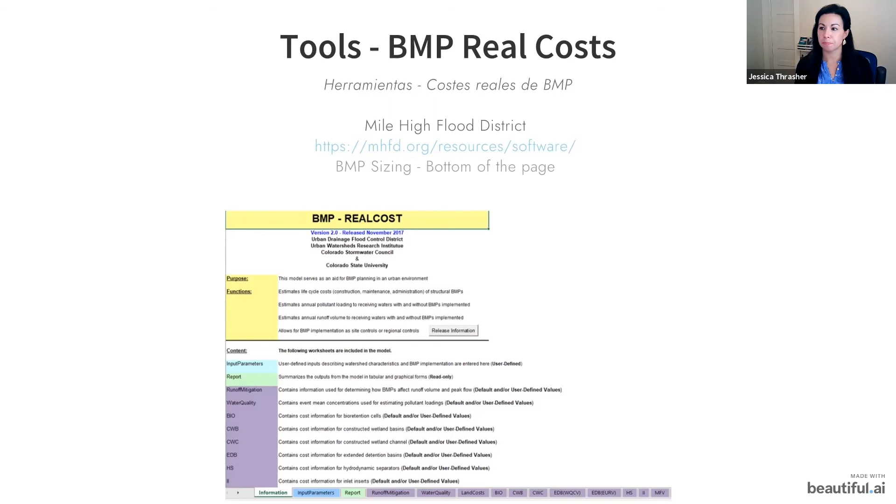Since fires are very real in our communities right now, we're much more likely to have large flood events after a fire. The Navigate the Flood resource is especially relevant at this time, and it's free, like all the resources I'm sharing. This resource helps you look at how resilient your community is, what challenges it might have, helps with vision and goals for the future, helps choose the best community solutions, and then put that plan into action. Navigate the Flood is part of the Tap into Resilience toolkit, one of many tools at your disposal for moving forward.

The final tool I wanted to highlight is the Equitable Infrastructure Toolkit. As I mentioned, our lower income areas and vulnerable populations are hit hardest by climate change, whether extreme flood events, fires, or air quality issues. As we move forward making our communities more resilient, focusing on equity is really critical. This toolkit talks about all the ways you can incorporate equity into your future planning. It's by the River Network.